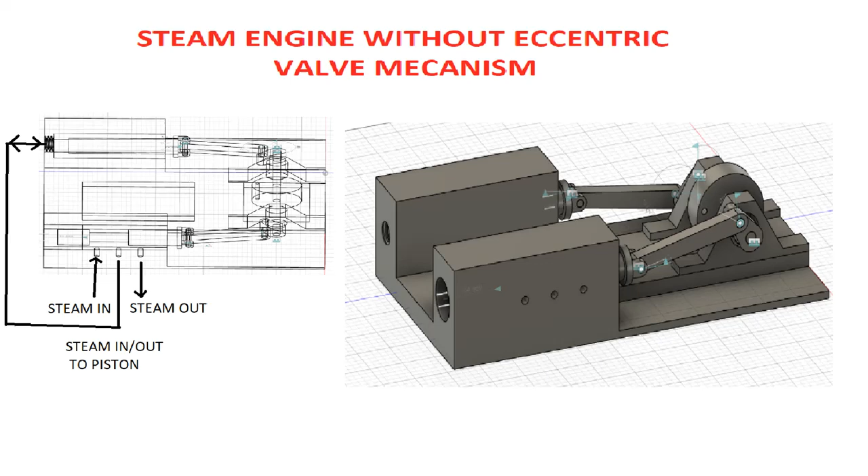I mean, the basis for this design is that I want to use steam, real steam. So there's a lot of improvement versus my first design, where I was forced to use air because the valve here was too thin and steam would destroy the valve, but this is different.

And basically, what I'm doing right now here is that you can see the boring here is the valve, and for the piston, I'm going to be using 3/4 PVC. That's the diameter of the PVC that I will be using, about 3/4. And as you might know, the PVC has some thickness. So eventually, the inner diameter of that PVC is, if I remember right, about 20 millimeters or so.

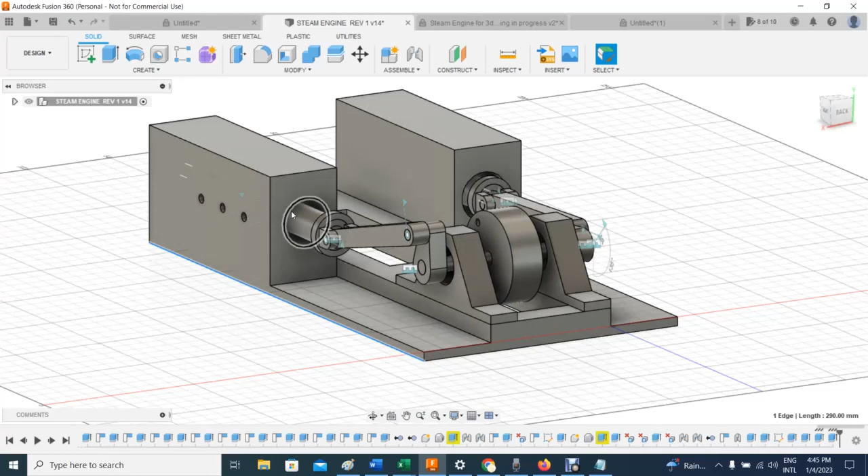And so I will reinforce the diameter of the valve with a PVC. That's the idea, to reinforce this section. And there's the same size on both the piston, the power piston, and the valve. But the valve is kind of different. I mean, this valve has been beefed up a lot. So I would say steam might not damage the valve.

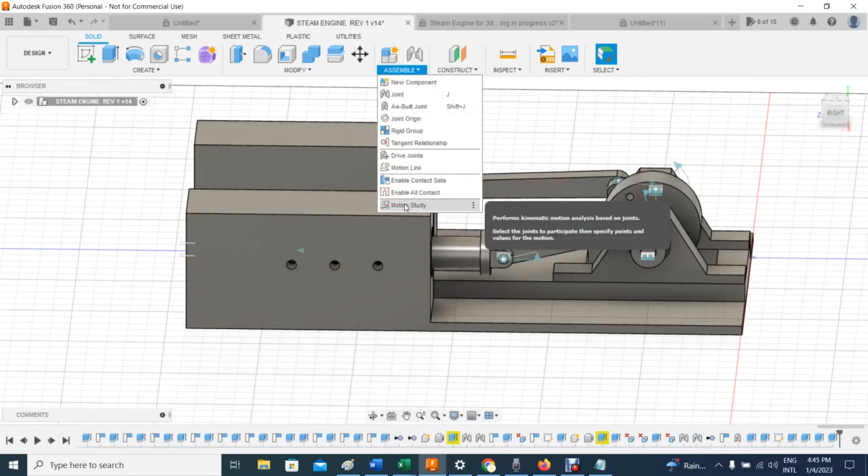So the main point here is, let's do a quick simulation of how this will work. So let's see. Actually, let's run it here. Let's do a motion study, and let's see where am I right now. It's gonna be 0 for that one. So the last step on that simulation will be, let's say, 100 here. So it will be about 360. So there we go. And let's run. There we go.

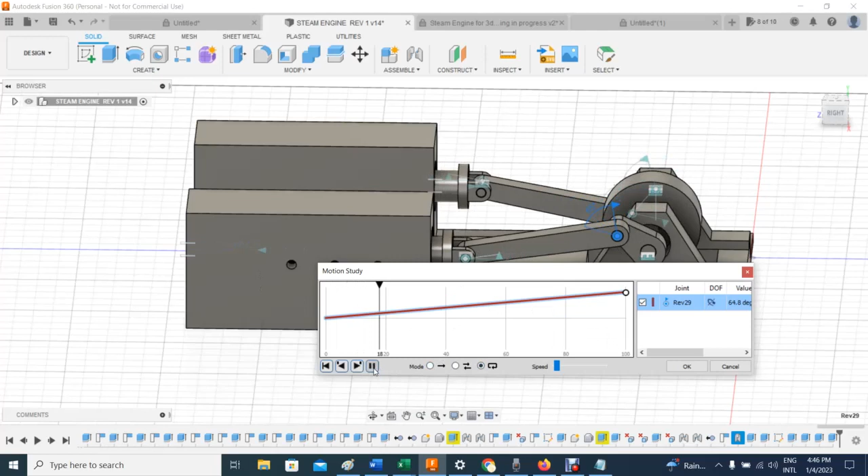It's turning counterclockwise because basically air or steam, and for sure it's going to be steam, is going to enter through here, and this is the one that will connect to the back of this side. I haven't done the bore here, I should, to finish this. So right there is where I will be putting another connector, like from here to here, and this is the escape, where your steam will come out through this hole here.

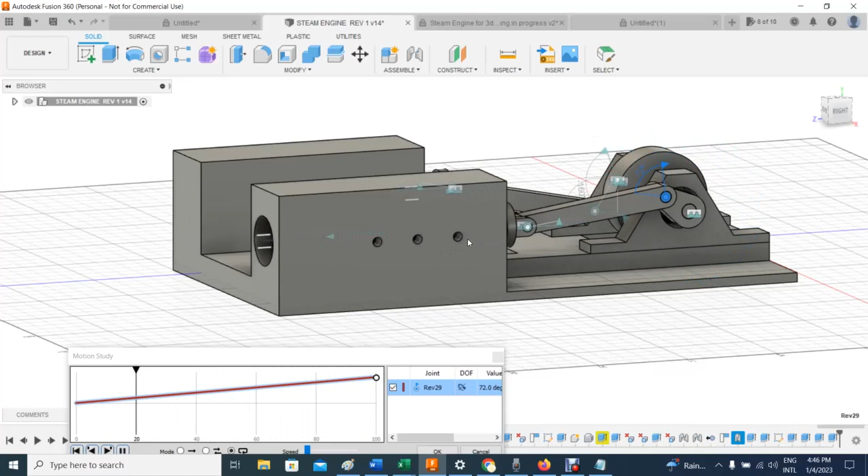So I haven't finished yet the boring and the thread that I need on this part here, but it's just to give you an idea of how this looks and how this steam engine will perform. There's many things that I'm trying to implement here. Let's move the speed, very fast. It worked pretty well, since I'm not using any contact surfaces. It worked perfect.

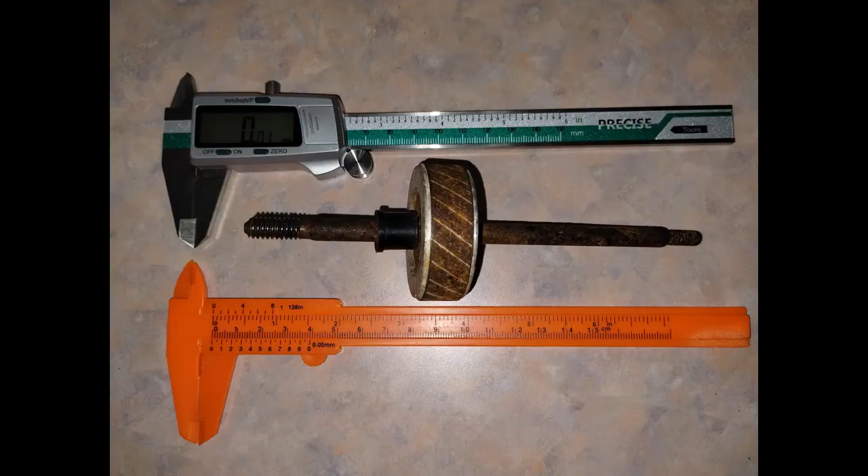Now let me go more slowly on this, very slow. This part here is gonna come from a fan motor. I will use the internal part of the fan motor that is heavy enough. I can have a lot of friction here and it still should work, because basically this piston will have a groove for a seal, a rubber, kind of an O-ring seal against the PVC. So I definitely believe that this will work better.

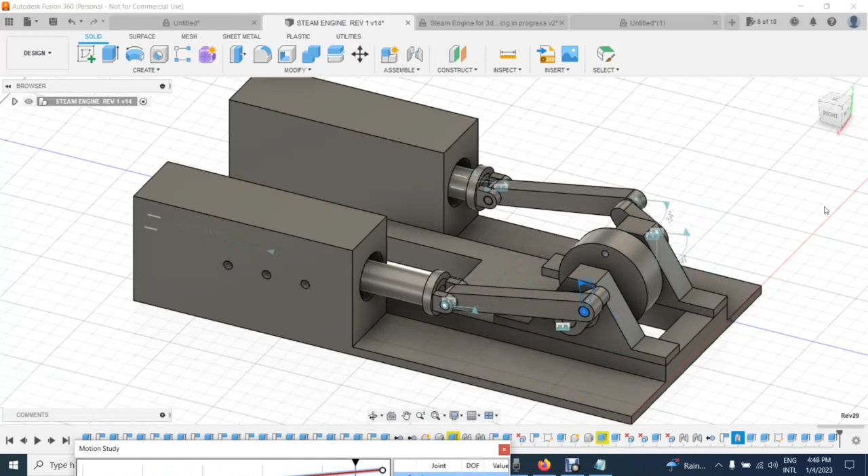Now, in terms of timing, there's a whole new story here that is totally different from a regular steam engine. I'm not actually using an eccentric. I'm using exactly what I have here on the power piston on the crank. It's the same crank that I have right here on the valve. So that's why you have these three holes here, and there's going to be power pretty much in the whole direction of the power piston, and it's going to be opening, dropping down the piston, so steam or air will escape right through this one.

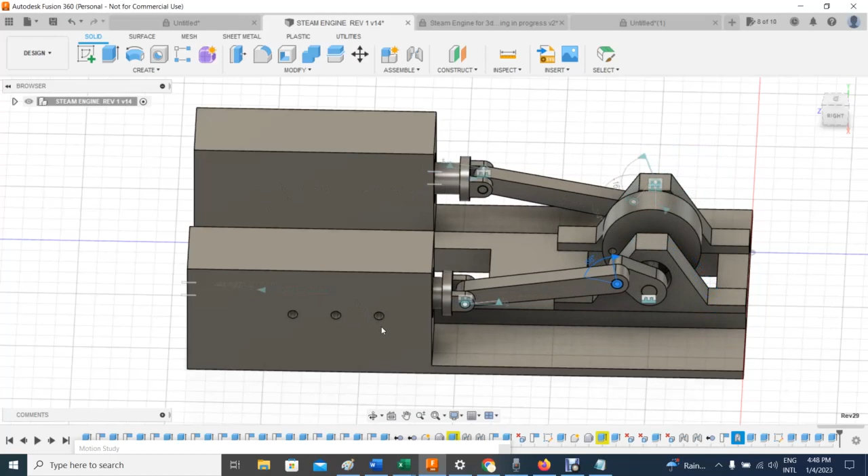So the story is this: to watch this closely, let's change this to wireframe so that it's easy to understand what's going on. You see, this is the valve. The valve has a smaller diameter at one point in time, and that will create the connection between the input of steam, and this is gonna be a hose that's gonna connect right through here, through the back.

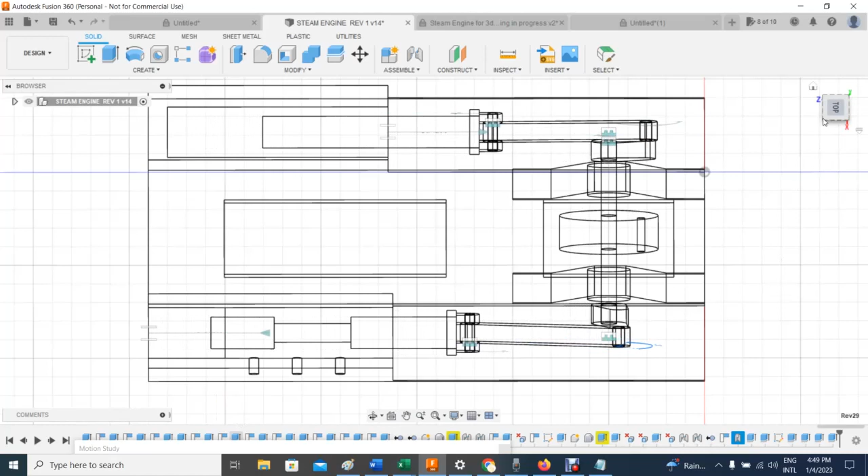Instead of having that simulated, let's move it myself so you can understand better what's going on here. But I still want you to see as much as you can how this is turning counterclockwise. So let's escape from here and start to move this very slowly. For example, right there, you see at that step the piston is pretty much right at the bottom. You see, now it starts to go up. Now there, it moves up. The piston right here starts to go this direction.

Steam will go right through here, and this part here is closed. So now you have this and this open, meaning that steam will go right here and will escape through here. Eventually there's a hose connection that's going to connect at the back of this piston and will push it up. So as I turn this counterclockwise, you can see now that the opening is even better for steam getting in and eventually getting into the power piston.

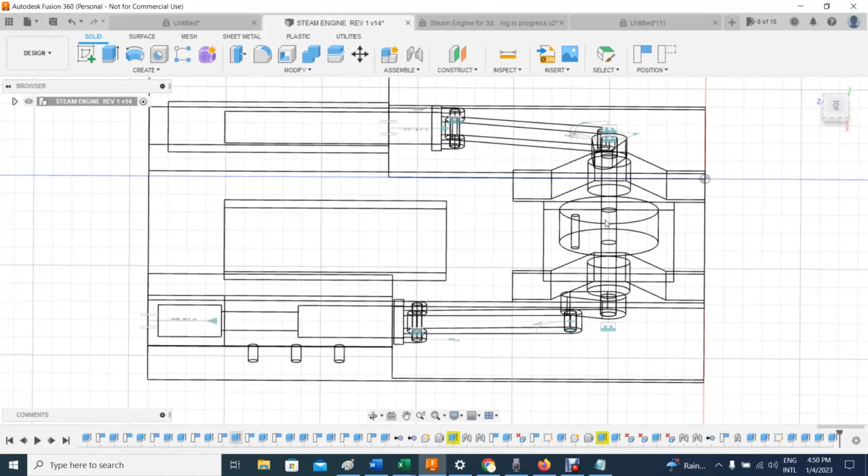So as I keep going up, I still have a lot of steam getting into that engine or the power piston until I got to the top. When I got to the top, as you can see at the top right there, pretty much there's no steam getting in because it's closed by this part. Remember, this gap that you see here is going to be covered by the thickness of the 3/4 PVC pipe that I'm going to be using to ensure that this can definitely use steam without problem.

Now, what's happening is that you can see that the opening for steam to escape is already open. So whatever steam is trapped here within the piston will come out through here, through a hose, and eventually through here. This is closed, so this will come out through here, eventually through this hole out. So that's how it works.

So again, I'm not using an eccentric. I'm using the regular cranks for the piston. It's the same one that I'm using on the valve. However, they are 90 degrees apart. In other words, this crank is 90 degrees apart with respect to this one. That's all. Now, if I keep turning this counterclockwise, as you can see,

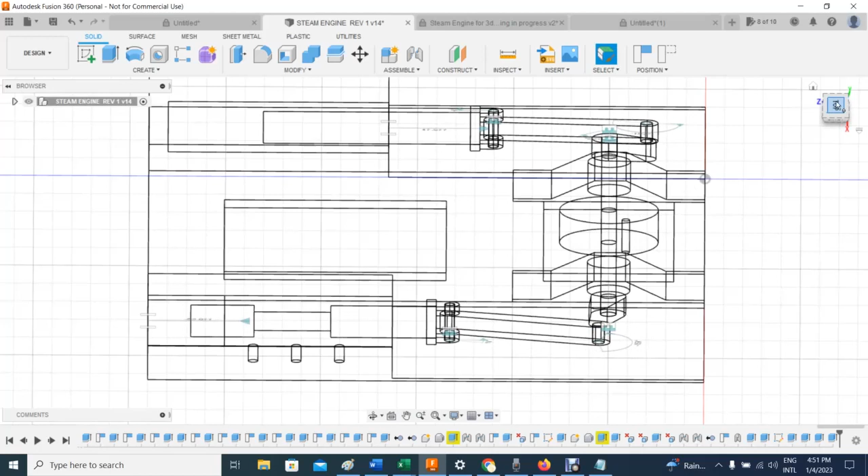let me see, I'm a little confused here. Let me see. It's this way. Sorry for that. I said there's something weird. No, it's counterclockwise. That's why.

Now, as you can see, I keep rotating this, and now the opening for the piston going from here to here is still open, and the escaping of whatever is trapped within the piston, there's no stopping until you get right to the bottom. When you get to the bottom, then the cycle starts again.

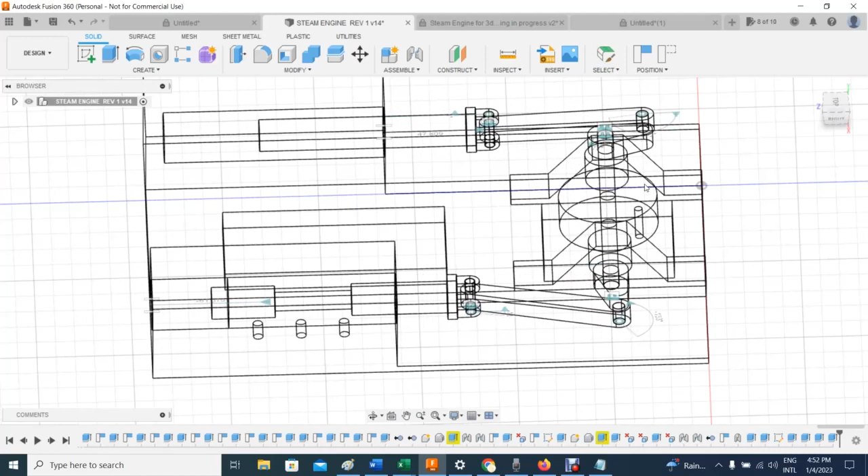You open the steam, and the steam will get in through here, eventually to the back of the piston and push it all the way to the top again, and thus the cycle repeats itself many times. In my first design, I was always concerned with the thickness of this valve. This valve is quite thick, and I'm not planning to use very hot steam. I think at the most it would be about 150 degrees C.

So a little below the 200 mark when the PLA starts to get weak. So I will say keep it between 125 and 150. That will guarantee between 10 and 20 psi of pressure, good enough that this engine will definitely work. I don't require too much pressure on this engine to work. So that's the main point.

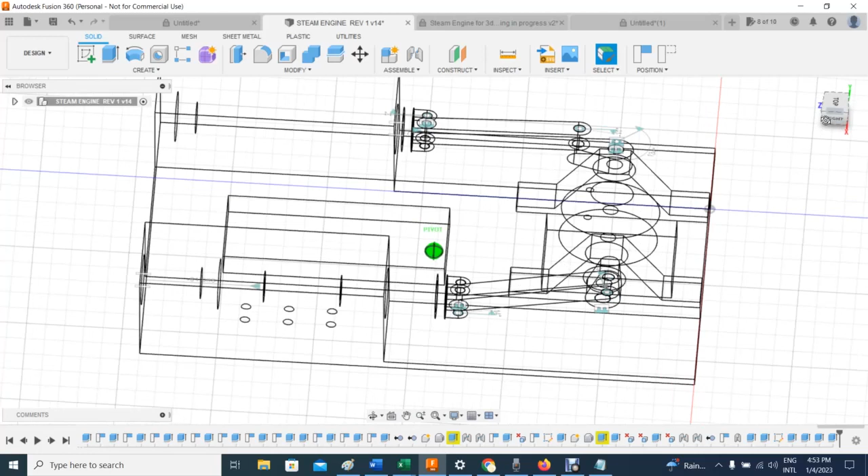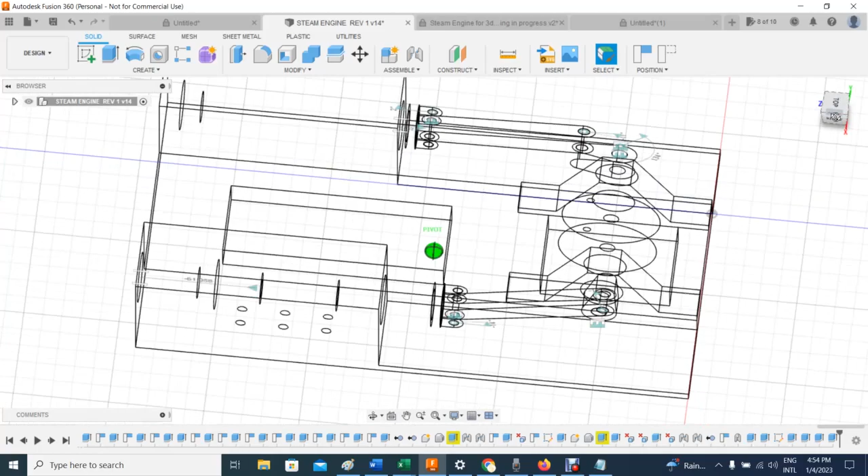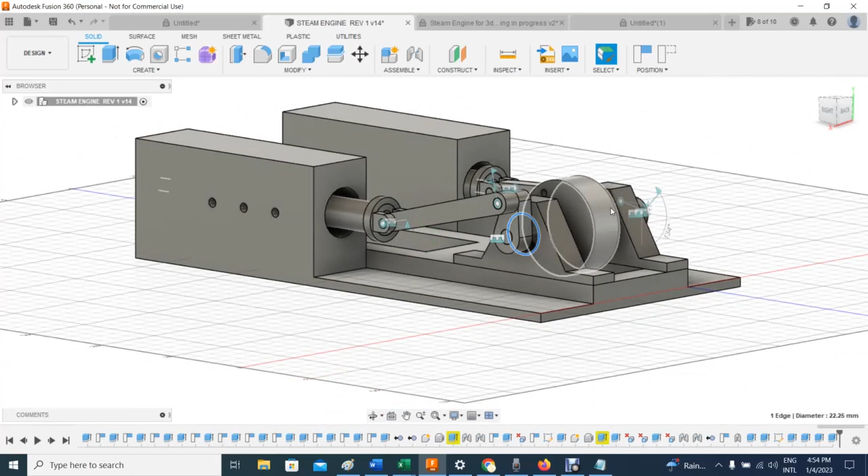Remember this part here, this shaft and the flywheel are part of a fan, the rotor for the fan. So I will cut it to size and glue the cranks, and that's how it should go. Printing. Before talking about printing, let me go back again to this. You can see there's the shaft and there's a gap here. That gap is because I'm going to be putting a ball bearing there. So this flywheel will be in ball bearings. That will definitely ease any friction on both sides.

The crank is identical in terms of length and size on both sides, and the length of the push rod as well. So let's see if there's anything else that I want to show you here. I think that's pretty much it. The important thing, this looks like one piece, but this will be cut right here. At printing time, I'm going to cut this part, so it's going to be two sections here.

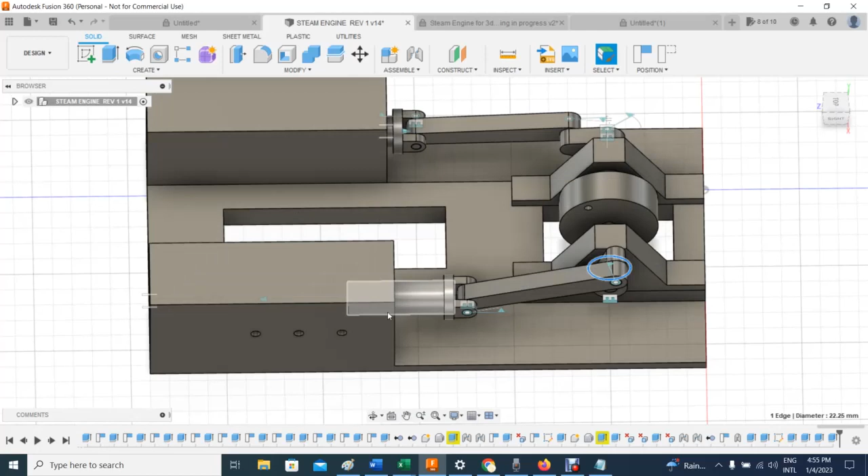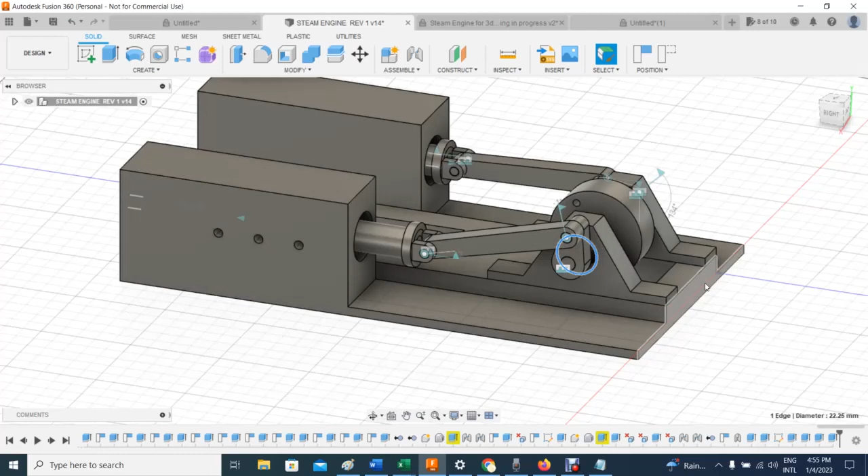This section, the housing, the power piston and the valve, will be printed probably this side down so that the internals of the piston and the valve are clean, so you don't need PLA support during printing. That's very important because otherwise you will have to take all that material out and sand the bored holes, and that's not good. So probably this will be printed that way. Now this part here belongs to two parts. These are the pillow blocks.

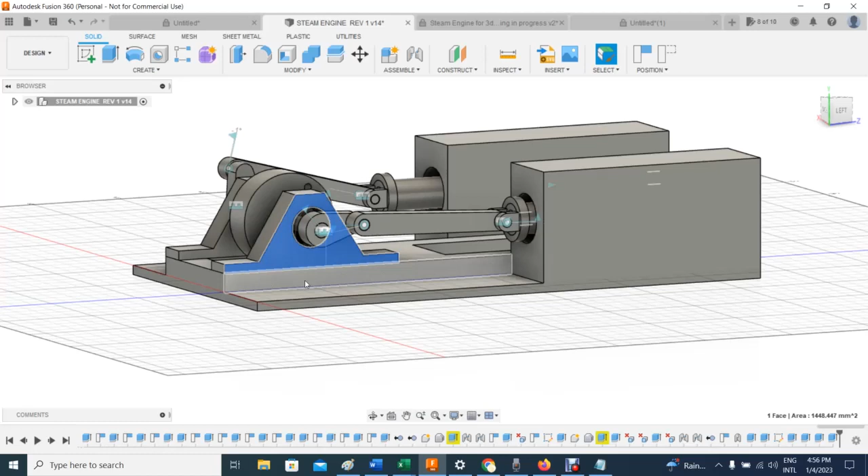The pillow blocks, these ones are the pillow blocks, and they are identical as well, both sides, and they will be printed as well, in a separate section. And I'll probably print them this side down. So again, try to maintain as clean as possible the boring part, and so this base here will be printed as well, in a different shot.

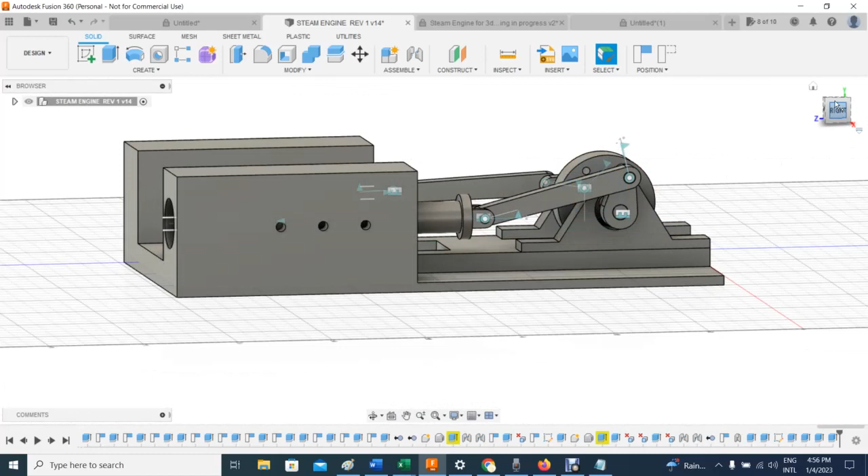So basically, it's about 4 or 5 types of printing that you have to be careful how you print, to avoid having problems with whatever boring you have done on the system. Again, one thing, I'm not sure whether this will be the final design for the holes, the input, because this probably needs to be made bigger for a quarter of an inch hose or hose connector that I will be using here and here and here.

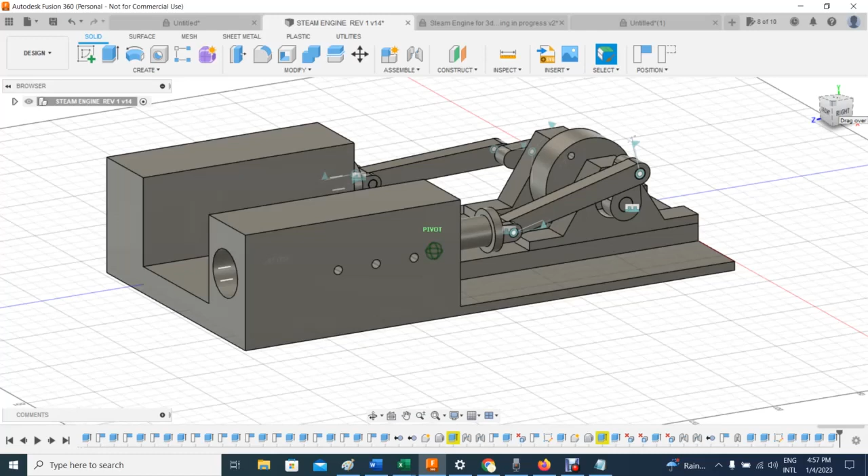So I haven't completed this design yet of what I'm gonna be using, and besides I also have to do a boring here. For example, I have to finish this part here, and I need to do a boring here somewhere. So let's see if I can get the center right.

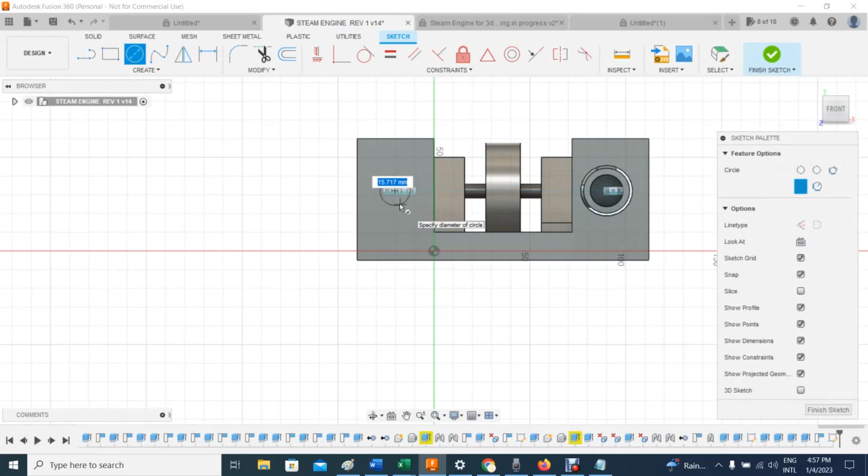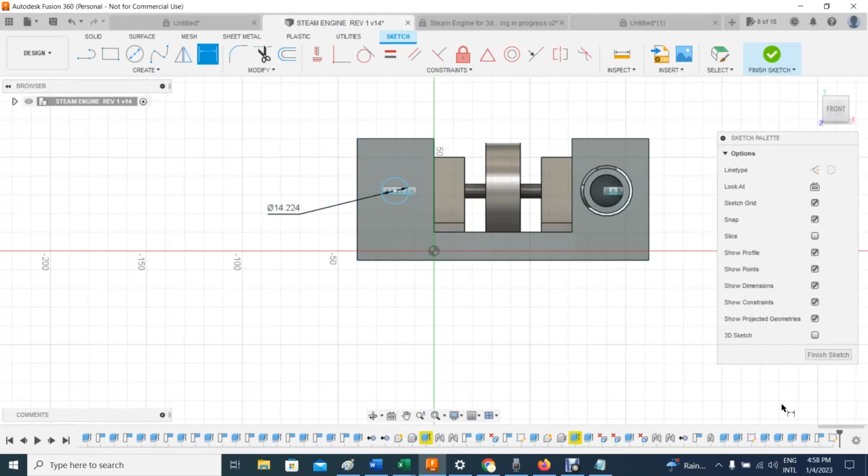Let's see, to get that right, that should be about, let's say 0.56 inches, and so it's 14.224 millimeters. So let's say finish. So that's where the steam will go in or out. So let's do boring here, and let's see.

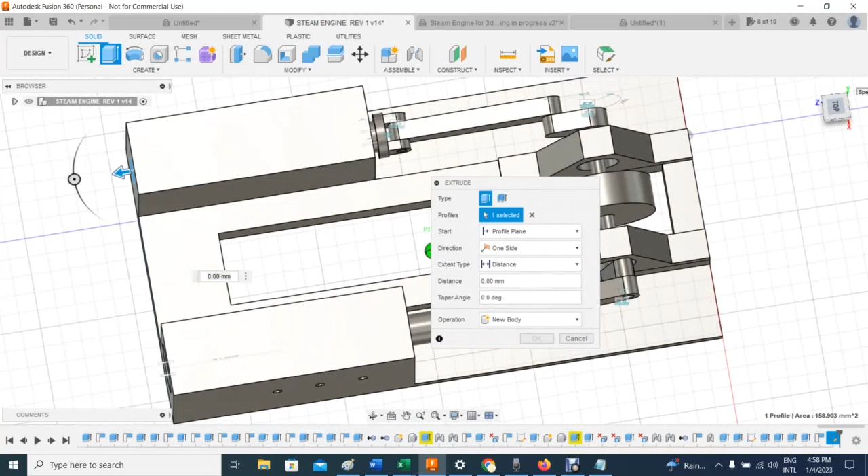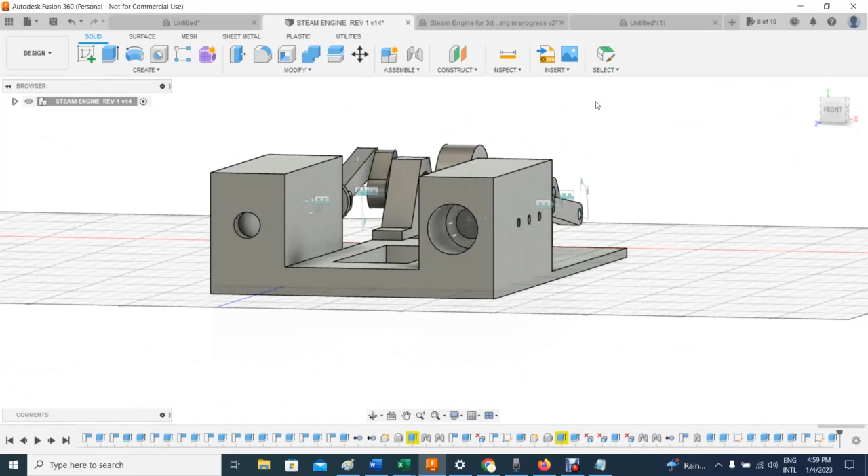With 10 millimeters it will do, I think. Let me see. We'll take a look in a second. Yeah. Now let's move these. Perfect. Now, that might need to be a little bit thicker as I see it, because 10 millimeters is probably not enough to get a good grip of a connector that you want installed there.

So you might have to do something here to ensure that you got a good grip of that. Like I put an extra piece here, but I hate that because this is probably gonna be the bottom part when I start to print it. So adding anything here that bothers the printing process, that's not good. You want this surface as flat as possible, like this one, nothing bothering the printing process.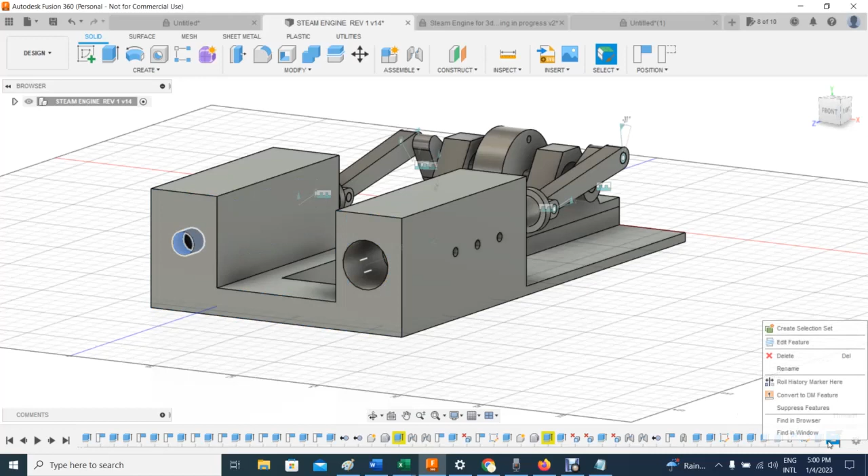So in essence, what I'm doing here is go here, do a thread, and let's use Acme. Probably I'm using 0.5. Let's use 5/8, and so that will do. Oh sorry, let me go back here for one second, and so let's model it, and that's basically it. That's where you will install your hose connector for steam getting in and out from this hole up to there. So that's the main point to get this done. That will do.

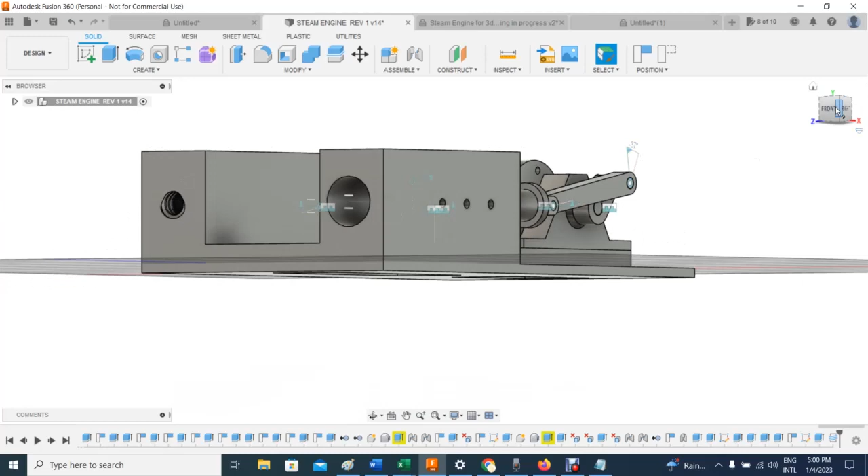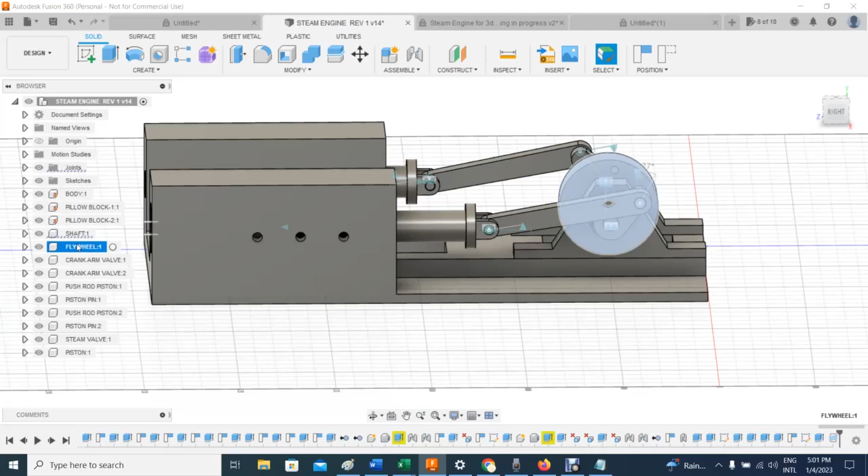I guess that's how this will go. Let's look more into it. Here are all the parts: the body, one of the pillow blocks, the second pillow block. They are identical. The shaft and flywheel come from the motor, for the rotor or the fan. Crank, one crank, the second crank. They are identical. I'm not using an eccentric here. The push rod and the pin that I'm gonna be using. The other push rod, the other pin.

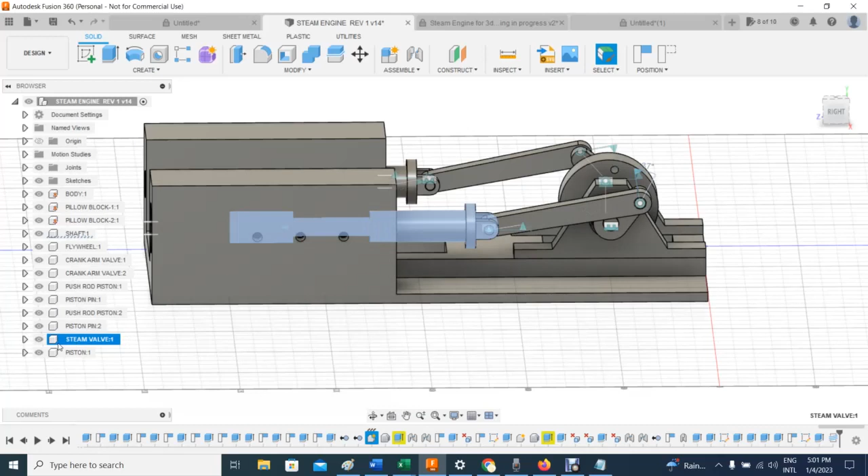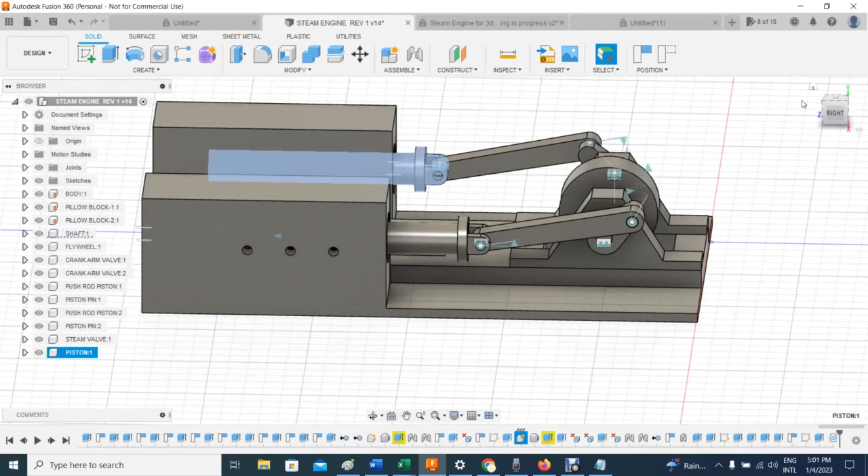The steam valve, as you can see, is kind of different. The distance from here to here is about 40 millimeters, which is about double the crank, which is 20 millimeters, and the piston. The piston, I haven't yet designed the groove for the seals. That's gonna be done later. But I'm gonna print small pieces just to ensure that I get a good seal without too much friction between the power piston and the internal diameter of the PVC. So I think that will do.

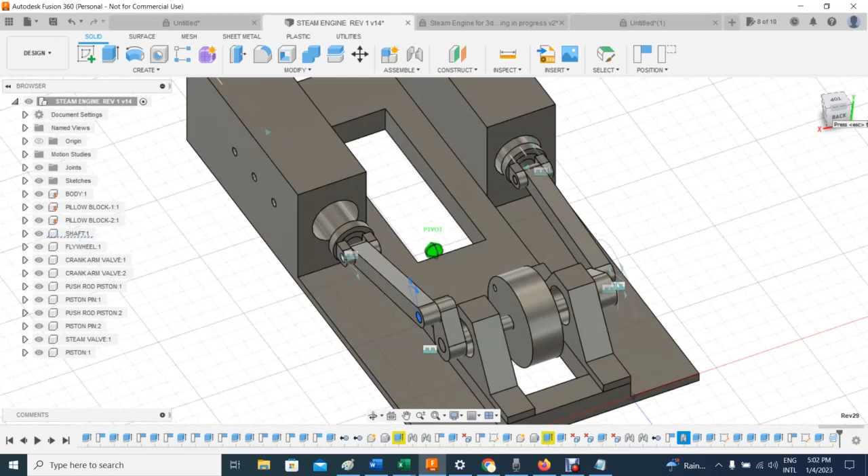Let's animate the whole thing, and let's take a look through here. So that's what I want to show you. This looks pretty good. It's about, let's see.

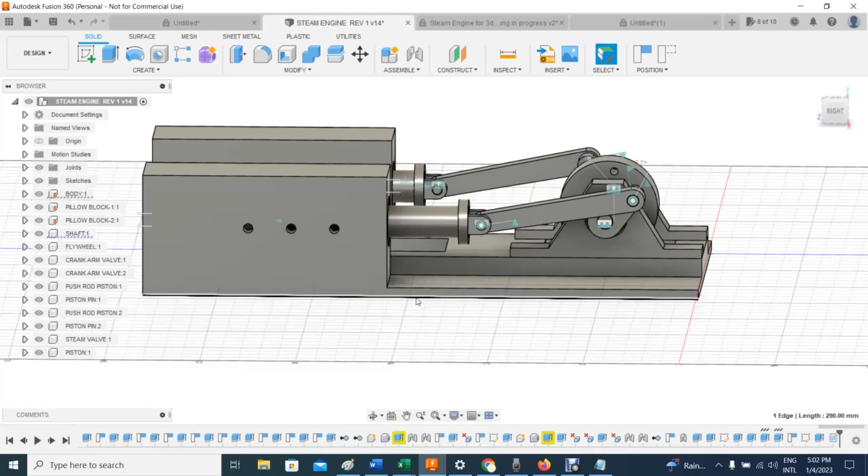It's about 290 millimeters. The distance there is about 300 millimeters, meaning about 30 centimeters, about 12 inches. Then the length is about 12 inches, and this part here is about 152, meaning about 15 centimeters, meaning about six inches. So it's about 6 inches, 12 by 6. That's the base, 12 by 6.

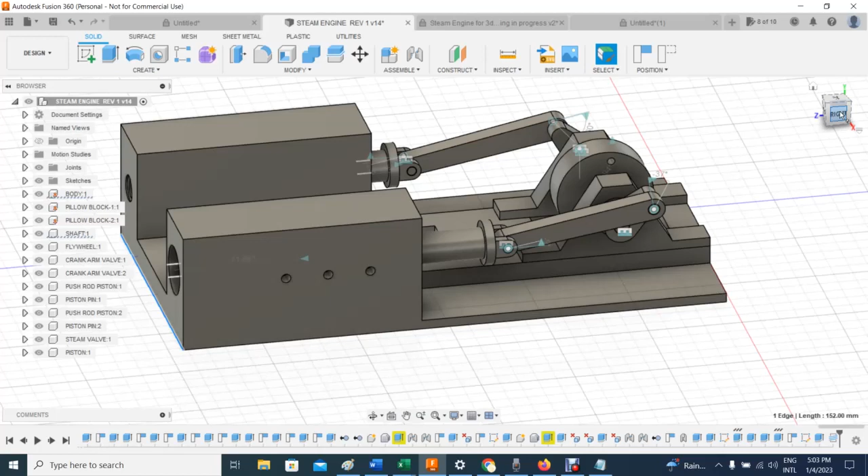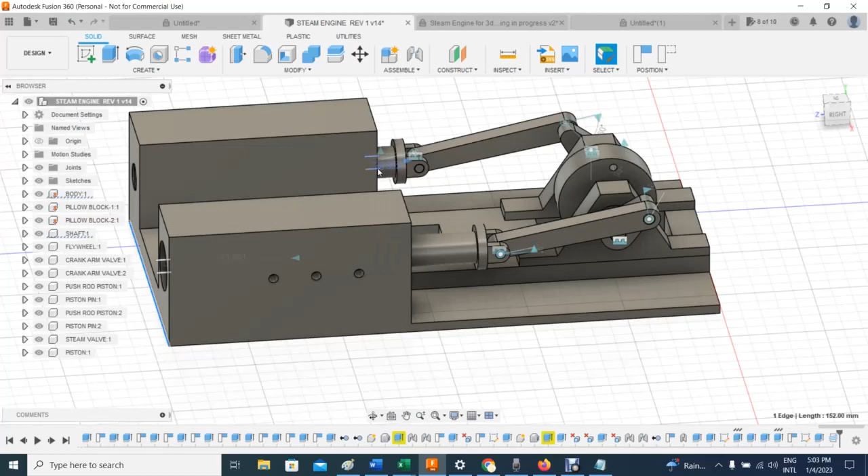Basically, because I want to install this on a 2 by 6 piece of wood that is very strong and sturdy. So it will look good, and that's the main point. Again, this design does not use an eccentric, so that will be something to talk about. This timing is power all the way up, and that's kind of different. So not sure how this will work eventually, but here on paper, in design, it looked good. Take one more look at that now that you understand what I'm doing.

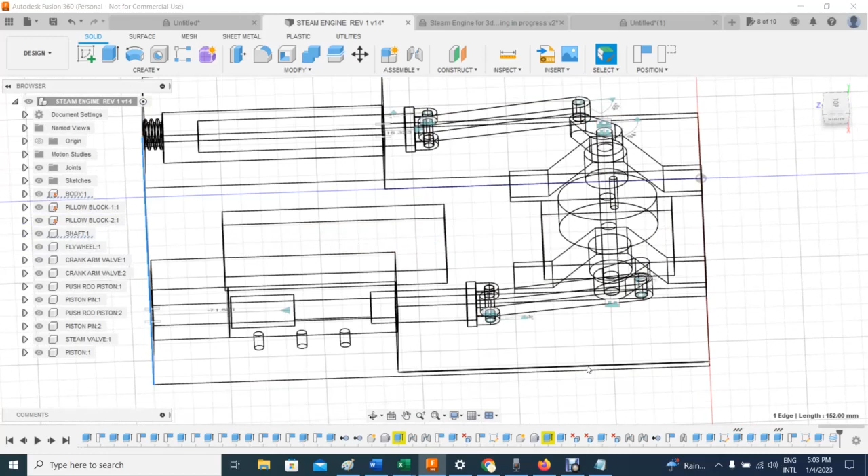For example, let's go visual style. Let's see wireframe, and now you have a better idea of what's going on. Right now the piston is right at the bottom, and as I turn this counterclockwise, let's turn this way so you can see me turning counterclockwise. Now you can see that this is open and this is open, so steam is coming out from the inside of the piston out. It's coming this way, in and out.

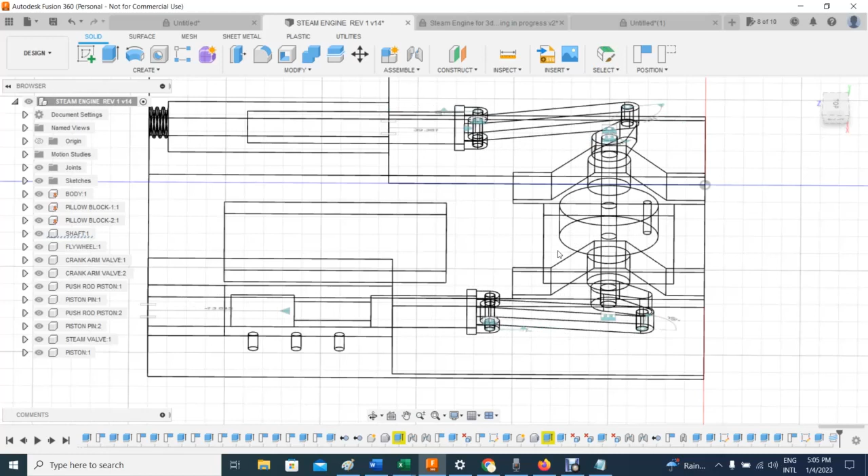As I keep turning, you see this is getting closed, but now this is getting open. So now is where steam is gonna get in, and I will have full steam getting in through the valve, out to the middle, into here, pushing the piston up, up, up, until the cycle changes. And now the piston is coming down, and you have this opening. So the steam here is going to be pushed out through the middle here and coming out through this side until eventually the cycle repeats itself. And that's more or less the design that I'm working on.

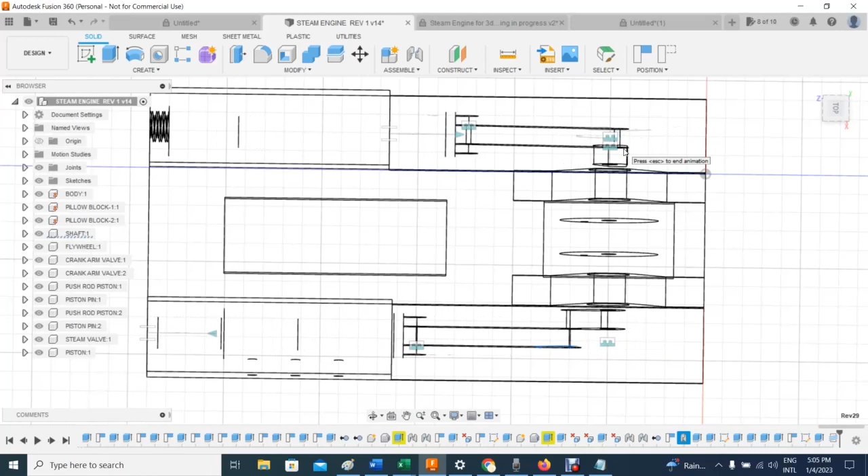Let me animate that. So, there we go. The travel here, the stroke, is about 40 millimeters. That's the full stroke because the crank is about 20 millimeters. And it's turning perfect in the right direction. When I finished doing this work, it was turning the wrong direction. So I had to do something that is called here a split joint and do some changes on one of the joints that I put together so that it turns counterclockwise on this design.

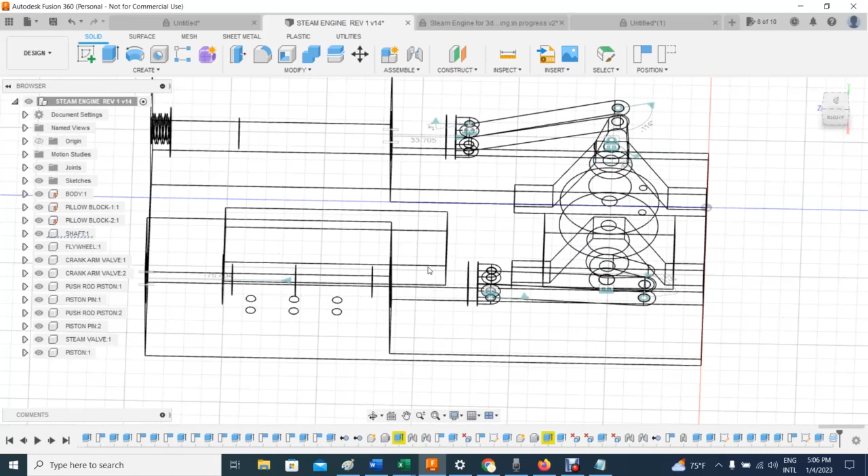Because the other way, steam will have to go through here, and this will be an exit. So you can change either way, but this design is better to have steam on this side because the valve will have O-rings as well to ensure that we don't waste too much steam through the gaps between the valve and the internal diameter of the PVC.

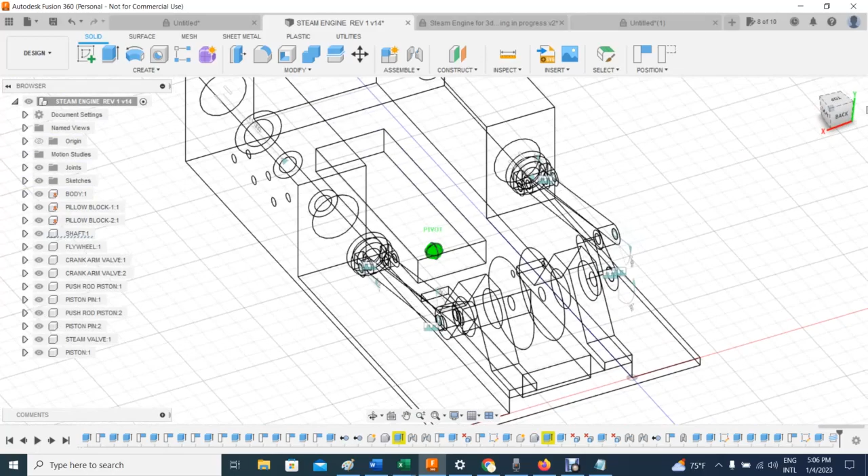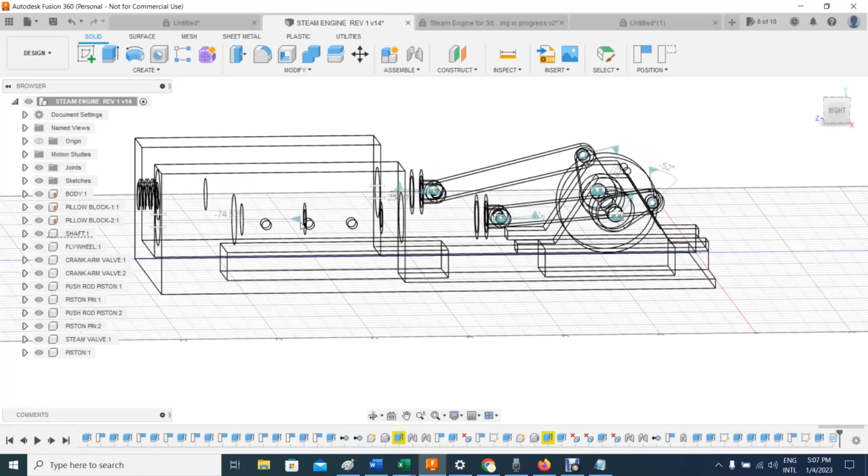Well, folks, I'm working on this, still doing a few things here and there. I still need to figure out this diameter, but as you can see, these diameters are huge. If I'm planning to use those MPT type of fittings, they will be huge here. So probably the one in the middle will be on the top. That's one thing that I'm gonna be working on. Probably gonna put this guy here at the top, and these two will stay the way they are.

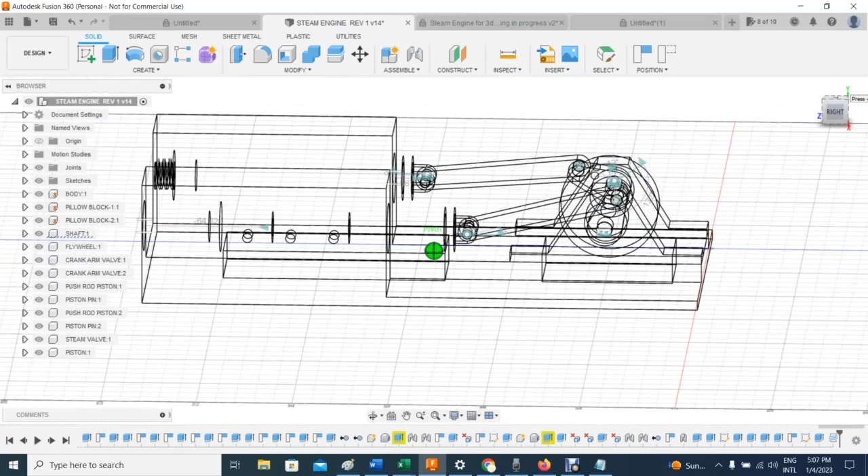And the only weak part that I see here definitely will be the valve again, but this is thick. I mean, we are using very thick. I would say it's about 12 to 15 millimeters, if I remember, the internal part of the valve. The external part of the valve here is about 20 millimeters. So it's just the internal part here that might be too thin, and steam might create some damage.

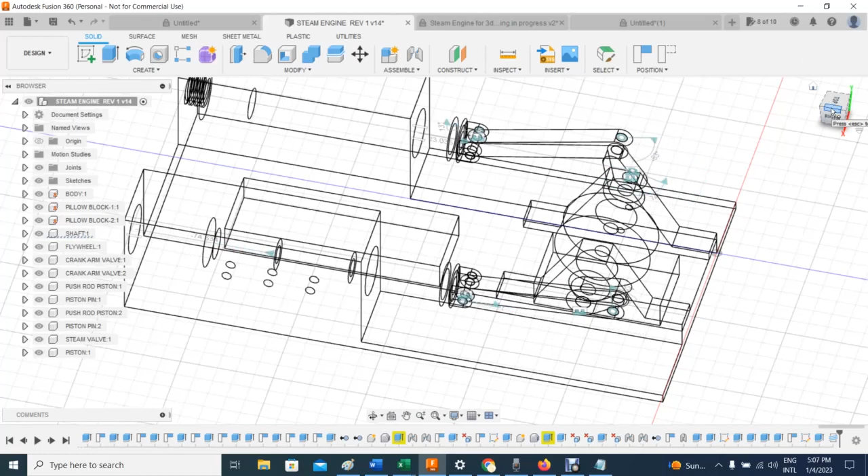But I'm planning to use steam below 150. That will provide enough pressure. It's going to be wet steam. That's what I'm going to be using. Wet steam, nothing like superheated steam. That will create a problem. I don't want that. So wet steam will do, and will protect the part as well, without too much damage.

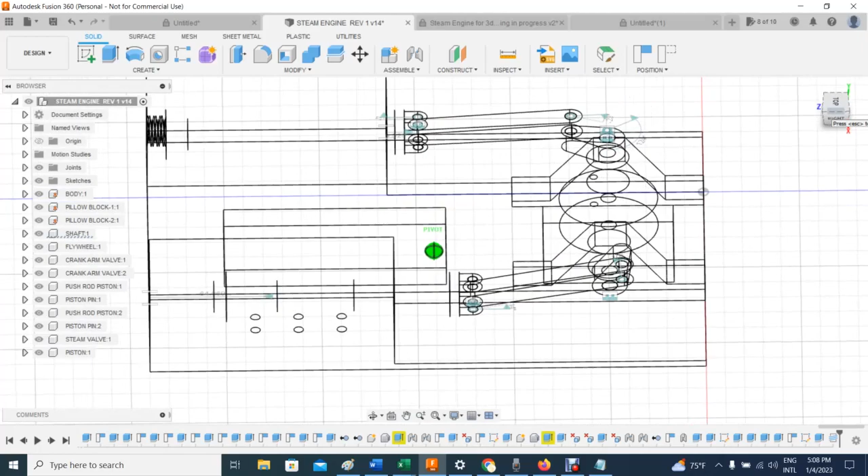And again, this was done in Fusion 360. Let's get this back to visual style. That will do. And this is basically how it looks at this point.

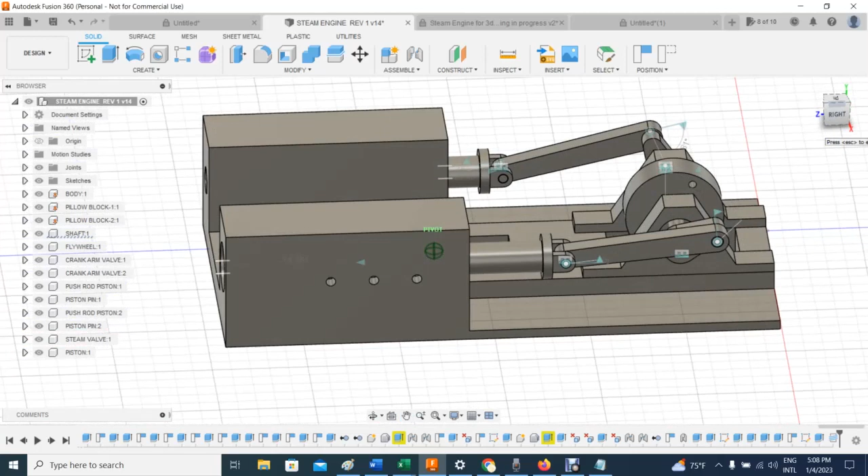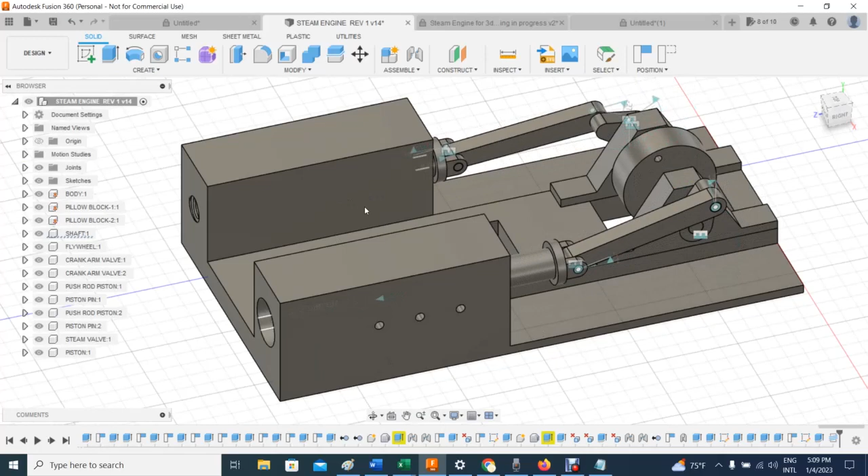I'm going to try to do some math modeling as well for the inertia, taking into consideration the flywheel inertia and all that, and see what would be a good behavior of this steam engine before I get everything printed, in case I have to do some changes. This flywheel is about 200, 300 grams. It's kind of heavy. I think that it might work okay with the seals, because I'm gonna have a heavy amount of friction, at least in the power piston. I plan to use from 2 to 3 O-rings on the power piston for a good seal.